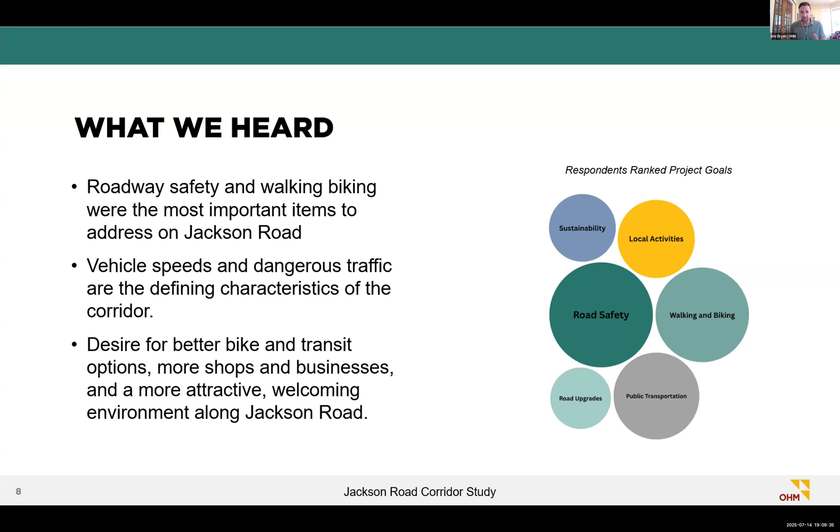There's a desire for more and better bike and transit options, more shops and businesses, and a more attractive and welcoming environment. We heard from some focus group members that there's a lack of identity in certain parts of the corridor as well, so we took this opportunity to identify ways to coalesce around a feeling we could strive for along the corridor.

I'm going to go through what we recommended. These are higher level recommendations at this point. I'm happy to answer any specific questions, but to be respectful of your time, I'm not going to spend a lot of time going through all of these - I think you all have the draft report as well.

So we organized everything into 5 focus areas: transit access, non-motorized access and connectivity, roadway safety improvements, development nodes and land use, and environmental restoration and preservation. These are the 5 goals we set at the beginning of the project.

When we think about transit access, the goal with these recommendations is to enhance how people use the transit network. Right now we have both AAATA and the Wave running along Jackson Road, and there's some desire for people to use it more, but they don't feel comfortable getting there and using it on a daily basis.

So some ideas we had to help spur that along - one, just making the fare system integrated between Wave and AAATA. That's sort of out of your control, but something important to mention.

A mobility hub in the Meijer parking lot - we already know there's a transfer point on the west side of Meijer, kind of hidden back in the corner. Our thought is to bring that out into the front, dedicate some parking spaces, and make a park and ride similar to the location TheRide has out on Plymouth Road - a place people can go to easily and transfer to take the bus into town.

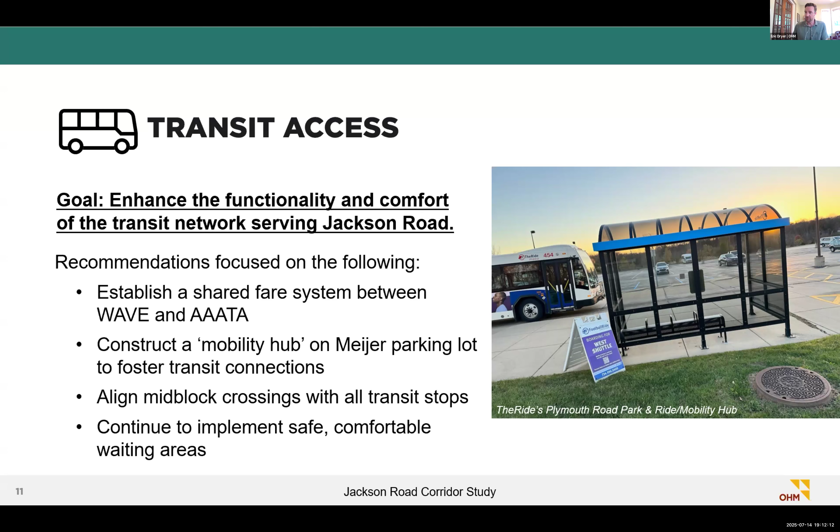It's a bus stop with a nice shelter and comfortable place to wait, some amenities, and real-time arrival signage, plus a parking lot with dedicated spaces for park and ride riders, and multimodal connections for a safe and comfortable walk or bike into the area. We'll also make sure there's wayfinding signage from Zeeb Road and Jackson Road saying there's a nice bus stop right in front of Meijer—come on in and use it.

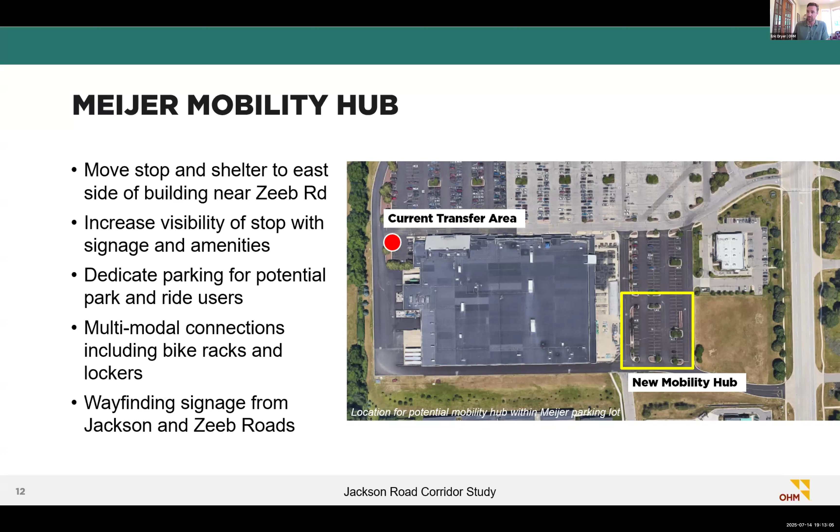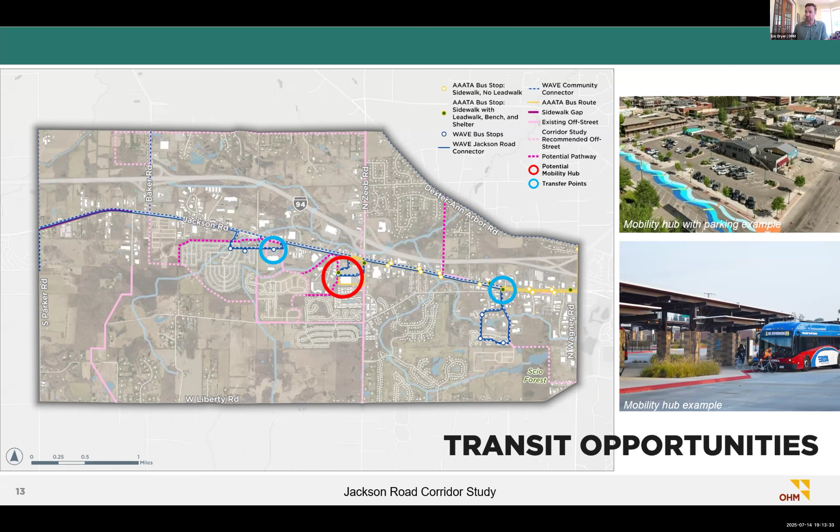This shows the scope of all the transit recommendations—where some of our mid-block crossings would go, where the transfer hub is located, and some other smaller transfer points that could be more like an enhanced bus stop, with a bit more of a waiting area and places for bike parking. It also shows how this organizes and fits within the larger transportation context.

When we think about non-motorized access and connectivity, the goal with this focus area is to make it easier for people to walk and bike. We've got a lot of adjacent neighborhoods on either side of the corridor, particularly to the south, and we want those folks to have the opportunity to walk and bike when they want to access Jackson Road. There are a lot of amenities here, but what we heard was that people felt tied to their vehicles just to go to the grocery store or pick up a gallon of milk.

Some of the things we came up with to help foster walkability include filling all the sidewalk gaps—kind of a no-brainer—making sure there are no places where you have to walk through grass, particularly in the winter when there may be snow.

Introducing some pedestrian-scale lighting and landscaping—in this image you can see a light at the mid-block crossing shining directly on the pedestrians. In the months when it gets darker early, or even at night, we need to make sure pedestrians are visible, since there's a lot of traffic on this corridor and visibility is a big thing.

We want to increase the connectivity of our non-motorized network to and along the corridor. We've got the border-to-border pathway that runs through the township, the Zeeb Road pathway, and a whole network of pathways either in process or already constructed. Making sure people can get up to Jackson Road and back down to where they need to go in a safe way is really key to the future of the corridor.

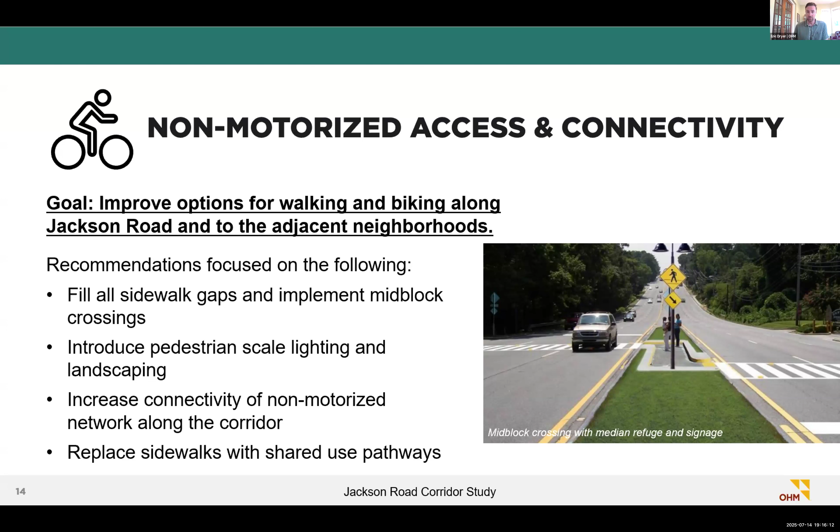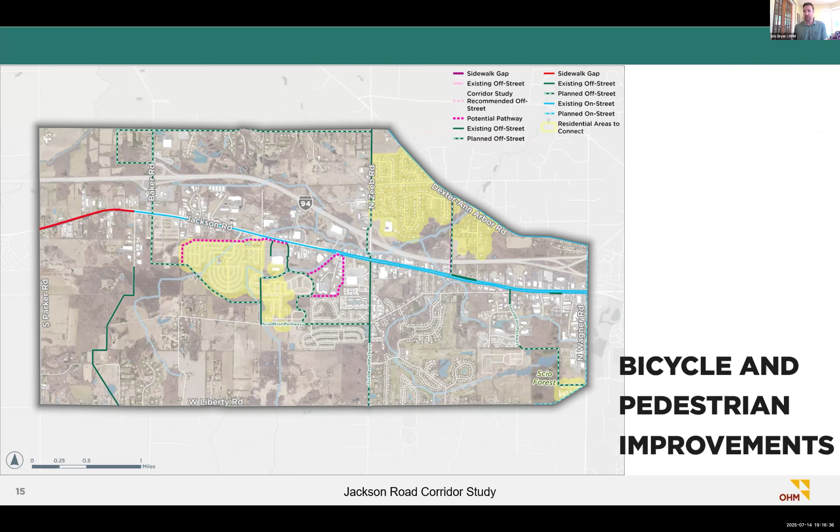Just a couple of recommendations here. We identified a few additional off-street pathways that connect into some of the neighborhoods. This builds on the PROS plan and some of the other trails and pathways you all have been thinking about, really trying to connect everything together a little more seamlessly.

Roadway safety improvements, this is the big one. Improving the safety and comfort of all users, including people in vehicles and motorists, but most especially the most vulnerable roadway users—your pedestrians, your bicyclists, your transit riders. A lot of this focuses on slowing vehicles down to the actual speed limit. We heard a lot of stories of people driving 60 or 70 miles an hour down Jackson Road, and that is dangerous for everybody.

So we want to make sure people are driving the speed limit using some geometric or roadway changes. One or two opportunities to do that are narrowing the roadway lanes to 11 feet from 12 feet, and reducing the turn radius of our turns. If you see in this image, there's just a little bump-out of concrete and some paint. That reduced radius means vehicles have to drive slower to get around it—rather than taking the curve at 20 or 30 miles an hour, they have to take it at 10 or 15, which is safer for people crossing the street.

We want to reduce conflict points by limiting the number of turns, and particularly the number of driveways—driveway consolidation. There are some areas along this corridor with a very high driveway density, and that contributes to a lot of potential safety issues.

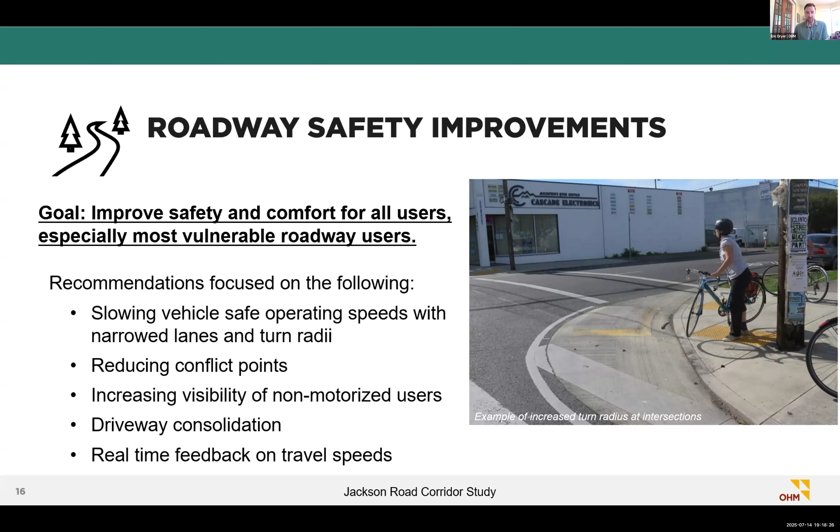We want to increase the visibility of non-motorized users by raising sidewalks, raising crosswalks so that people are visible through intersections, and then providing some real-time feedback on travel speeds.

When we talk about visibility, the raised shared use path crosswalk at a driveway entrance is a concept that could be applied to this corridor, where your head is above the height of a vehicle at the intersection or driveway entrance, so vehicles coming in or out see you as a cyclist or pedestrian much more clearly.

Additionally, you could add brightly colored paint and high visibility crosswalks to ensure vehicles see you as you're crossing. Introducing things like street trees, vertical elements, and moving buildings to a zero or near-zero lot line will help reduce speeds by giving that feeling of enclosure.

There's been a lot of research on real-time feedback signs and how well they work, and surprisingly, they work pretty well. Research shows they help slow vehicles down closer to the speed limit. It's not the end-all-be-all, not the only thing you'd do, but it does help.

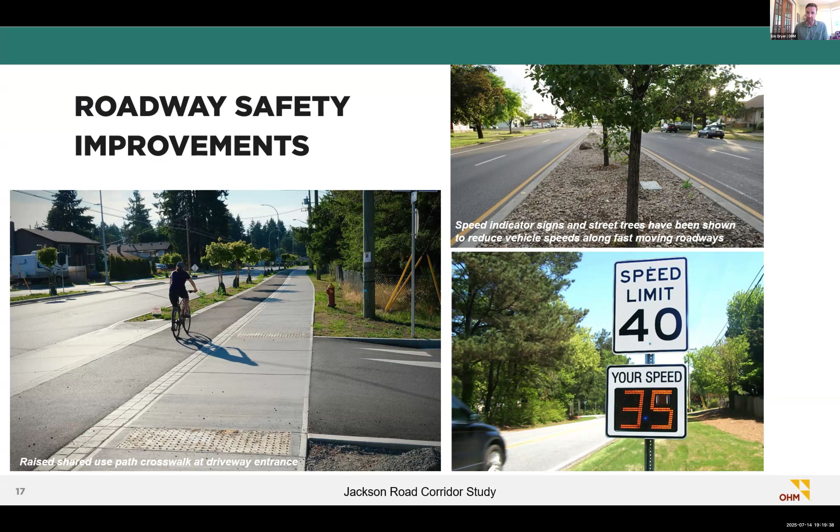We did some concepting of what Jackson Road could look like now, 3 or 4 years from now, and maybe 10 years into the future. This shows the existing conditions—a lot of parking lots abutting the roadway corridor, standard bike lanes in the street, 12-foot drive lanes, and a big center median. It's wide, open, and fast—not a place people would really want to go or choose to walk or bike.

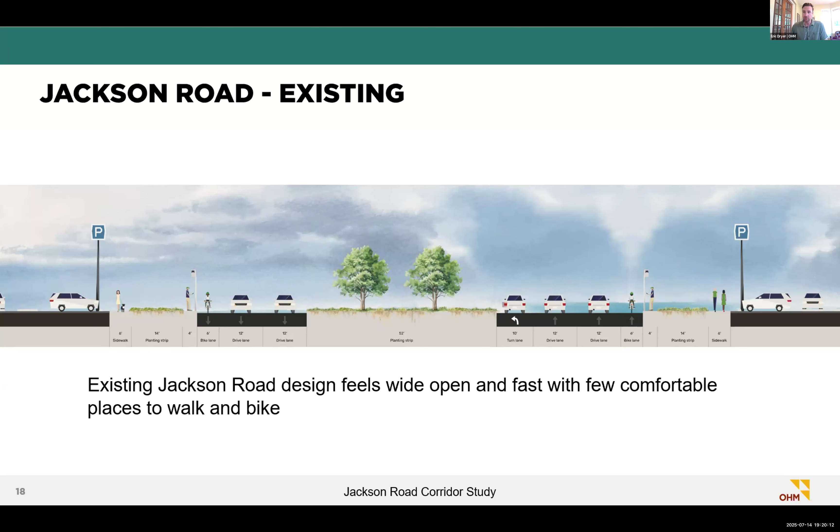With a little planting and some reallocation of space on the street, we can narrow those drive lanes down to 11 feet, giving extra space for a buffered bike lane. That bike lane helps slow vehicles down due to the narrowed roadway width, and also provides a shorter crossing distance for pedestrians. Adding more trees into the median—making sure no utilities block it—helps slow vehicles down due to the feeling of enclosure, and we're also introducing improved bus stop and transit elements.

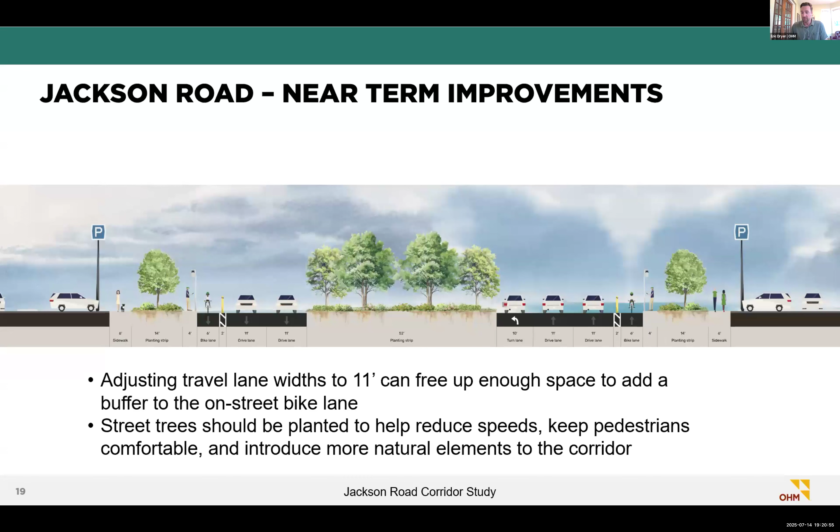And then into the future, as development starts to come in on some of the nodes we're going to talk about, moving those buildings up to the lot line, having a sidewalk right up against those buildings, and then taking our bike lane, transitioning it onto the outside of the curb, moving the curb line to where the buffer was. Still maintain 2 vehicle travel lanes, center turn lane, but the roadway has less pavement, less impervious surface, and a little more space for things like high quality transit shelters, the shared use path, 2-way bike lane with a sidewalk.

This is showing up to 16 feet if you really wanted to get wild with it and provide some space for non-motorized users. What really supports a lot of this is the landscaping and street tree growth within the median and within the sidewalk planting strips as well.

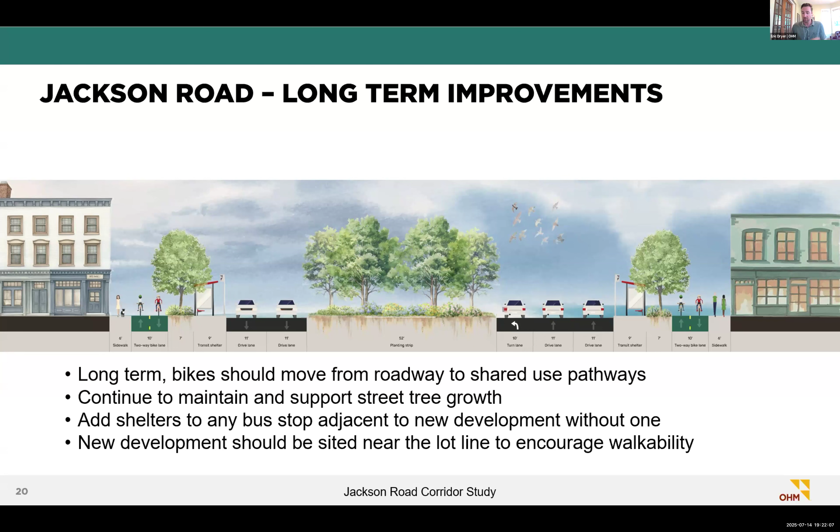We did a little thinking about development nodes and future land use. This wasn't the total scope of the project, but it's an important piece to start to think about how Jackson Road transitions from a place where people drive through to a place where people drive to and stay. The recommendations around land use really feed into some of the transportation elements we're thinking about. So there's 4 key areas along the corridor where we want to target development: Baker Road, at Menards, at the Zeeb Road intersection, and the Quality 16.

These are sites that have had a little bit of interest, if not full interest. There's already been some work done with the new development at Baker Road on the south side of the street, and we want to utilize that activity to spur new excitement and activity within the corridor. There's a real opportunity here to establish design standards that promote walkability, placemaking, local character, and build upon the non-motorized infrastructure we're recommending as part of the streetscape improvements.

This isn't going to happen overnight, so we know there's going to be a need to activate these nodes with short-term temporary activities and then transition those into longer-term permanent developments.

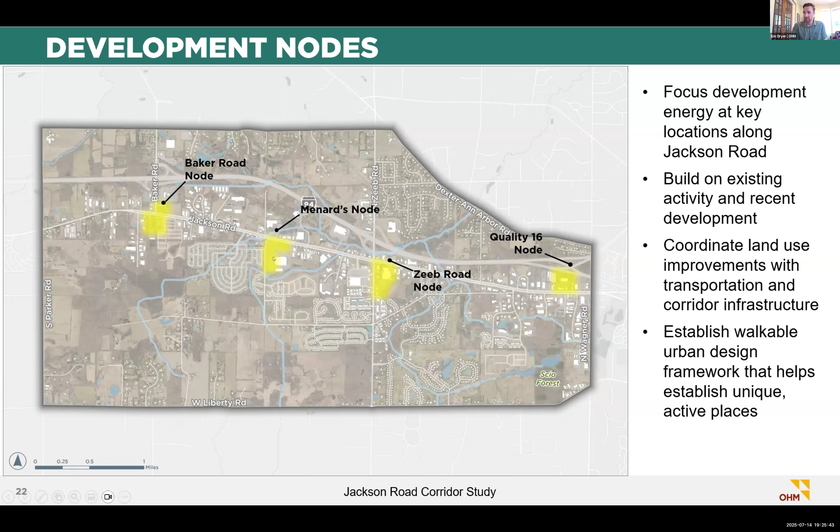So we pulled some ideas from other areas around the country. For example, the Menards site that wraps around the building there - these 3 parcels are about 18 acres, ranging from 10 to 33, you can see what other communities have done around the country. This is mixed use development with a range of retail, commercial, hotel, maybe a big box store thrown in, or a cinema, some green space or public space, and quite a bit of residential, both within the site itself and surrounding.

You can see the Suwanee Town Center in Georgia - their town center is this development here, but supporting development has folded in once that area got established.

These range from 10 to 20 acres, which seems to be the typical size we've seen, but all the way up to 33. This is the Rochester Hills example, a local example that we can pull from.

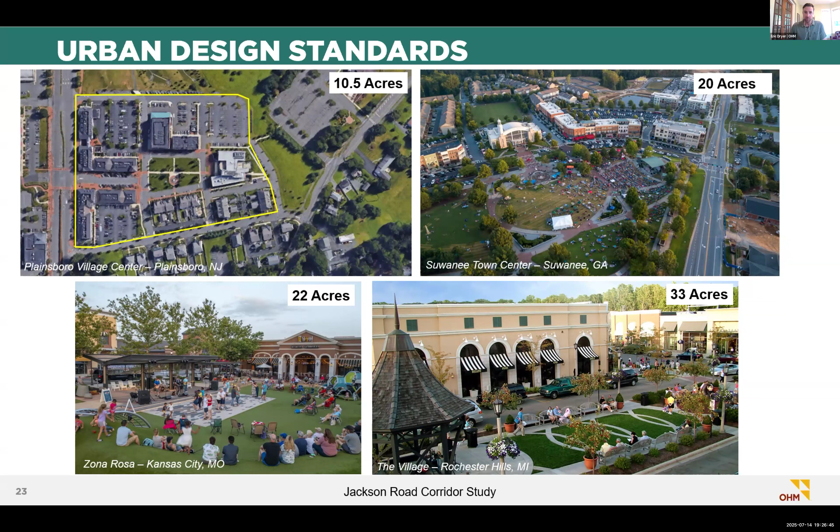We thought what makes Scio special is the surrounding natural areas that have been either preserved or are part of conservation land, and utilizing that idea of access to nature as a design feature was something I think you all could build on. Thinking about how to integrate those preserves and natural areas into future development could have a really strong way of attracting new people to the corridor and attracting residents to support these places. And making sure they're connected, like these pathways you see here.

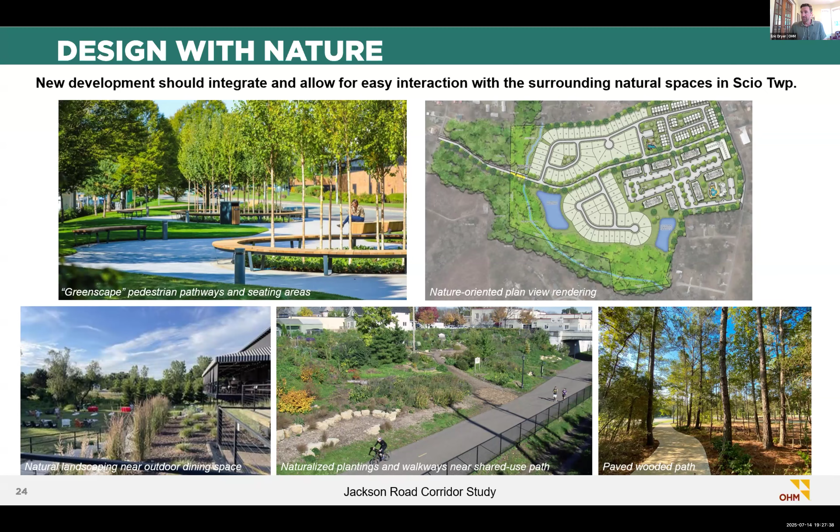And then finally, environmental restoration and preservation. This builds on what I just talked about, but maintaining the township's natural feel and character by having these tendrils of nature fold into the corridor. The idea around street trees, landscaping, greening up the corridor as much as we can not only helps with traffic safety, walkability, and making people feel comfortable, especially when it's hot out, but it also invokes that feeling of nature. We have a lot of big trees here in Michigan, and it's a good way of showing the character.

As part of that, we can incorporate green stormwater infrastructure within the roadway in certain areas, and within new developments, to ensure we're putting as little extra strain on the existing sewer system as possible. Thinking about the future of Jackson Road as this green corridor with connections down into the conservation areas and parks, up to the border-to-border trail, was a recurring theme that came up. A couple of recommendations around GSI, and this can continue to be updated as we identify other areas to include GSI.

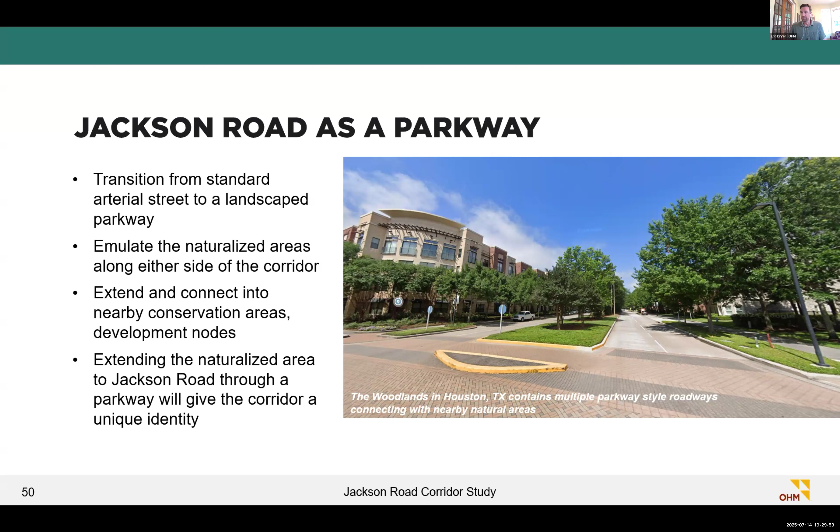So overall, that's a really quick overview of what we developed. The plan document itself has a lot more detail about specific recommendations. But really, this is intended to guide you all in decision making into the future and help investors, developers, and grant opportunities identify the next round of investments.

It's important to note that each of these recommendations will work on its own. They'll be fine. But as you start to incorporate more and more of them and co-locate them in those nodal areas next to each other, the recommendations will build on themselves. So you'll start to see greater and greater positive impacts as you connect trails within a development and have new shops, restaurants, and housing all co-located together. We want to co-locate those improvements in those nodes and then build out. If we try to spread things too thin, you're not going to see the effects that you want.

Connectivity to Jackson Road is essential for connecting new developments up to the amenities along the corridor, and ensuring people can get to other areas within the community. And again, we want to try to maintain that naturalized character as much as possible, bringing that feeling of nature up as close and along Jackson Road as we can.

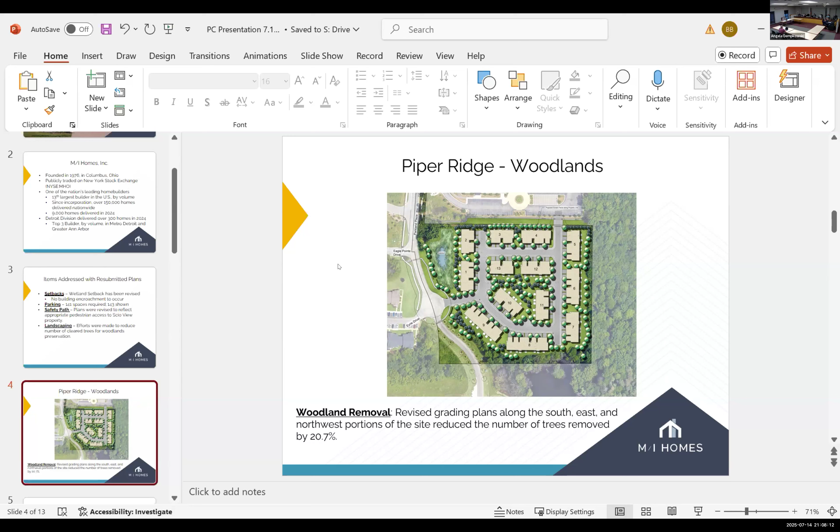Commissioner Fletcher, thoughts? There's gonna be trade-offs somewhere, they're gonna have to remove trees, but it looks like you plant some too, and no, they're not gonna be mature and big and beautiful overnight, but we gotta start somewhere. And I think what he's proposing is probably better than apartments - you're getting people that are buying versus people that are just tenants with higher turnover. It's not a huge piece of property, and you know.

I'm inclined to agree with both of these commissioners, but I am concerned about the placemaking stuff, so you need to work on that. It's not understood, and again, I will put on record, more than a path, I mean we need a playground, something.

Pickleball court, something. Well, little kids don't get into pickleball. But the younger generation is getting into it. More than that, the young professionals are. But it's easier to play than tennis. Sure, it's easier when you're used to it.

And frankly, I'd be willing, if you made the commitment, that the site plan would come back with some active recreation, placemaking. That active recreation suitable for young professionals and families.

I'm inclined to think that's a suitable use of the property. And am I understanding correctly where the gravel lot's gonna be, the 6 spaces, that's access directly into Saginaw Forest, right?

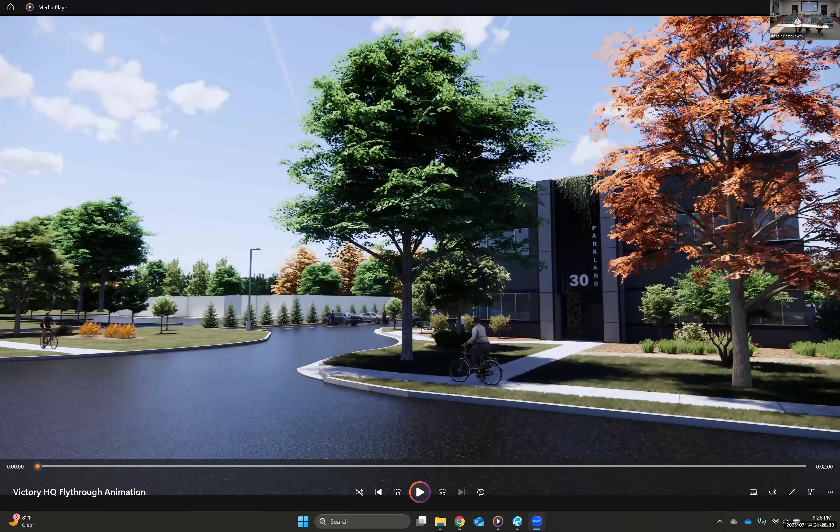So what we're looking at tonight, see the second building here, that's the first building that stands today, with the 30 on it. That building will be completely full. As he pans around here, we'll look at phase 2. We'd like to add the next building, which would give us space for an additional 60 to further consolidate people we've got scattered, currently working from home, as well as additional office space to bring them all here at Scio Township.

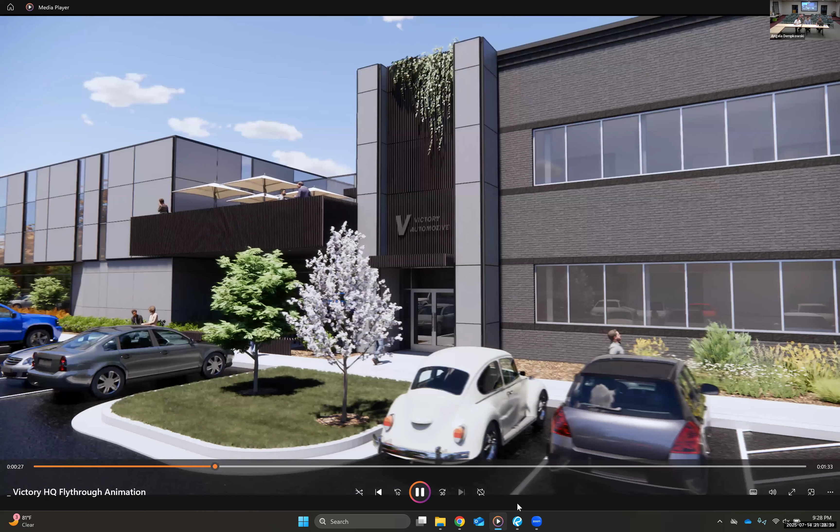So as part of phase 1, we're trying to move into the existing building there on Parkland. Phase 2 of this project would be a roughly 23,000 square foot addition to that, plus a little extra for an atrium and connector. It would involve restaining the existing block on that building facing Parkland, and painting some of the trim details to provide a more cohesive look for the overall concept of the site.

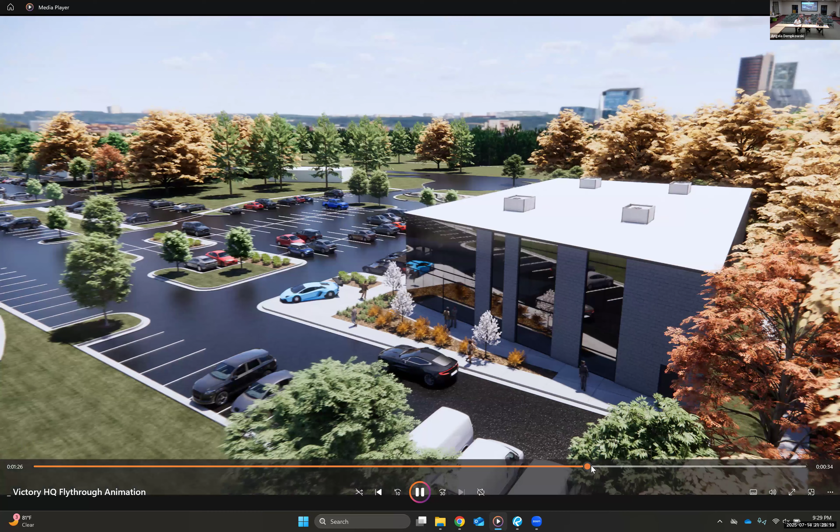Noting some of the things discussed with our neighbors to the south in Parkland Plaza, the property today already has a walking path that we're hoping to rehab, along with some additional landscaping. We planted a number of trees there, and as you can see from the concept, we're looking to add additional places where our employees can get outside and be involved in the natural landscape.

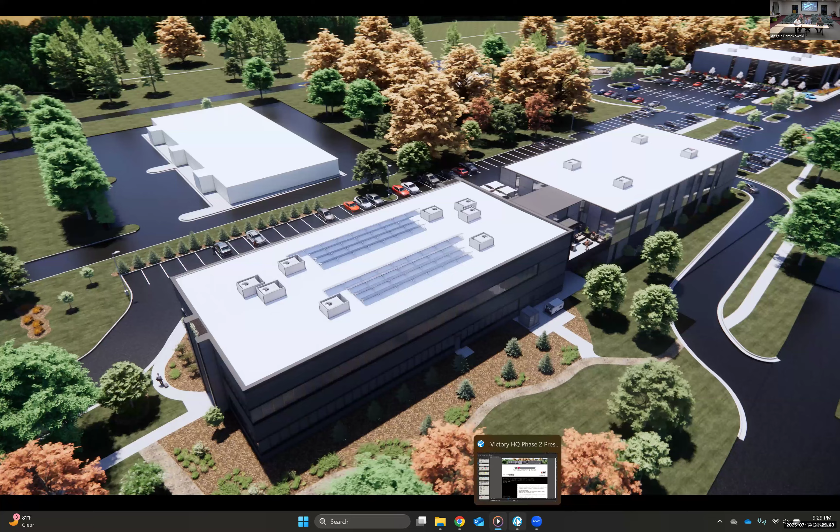We actually did talk about pickleball courts painted on our parking lot. We want to have that, and the building will also have a gym, so we want people to be active and not just sit inside all day. The property today has an existing koi pond to the south, which we didn't maintain. We're hoping if we add the next 2 buildings, we'll continue to expand more of the landscaping and the recreational side of it.

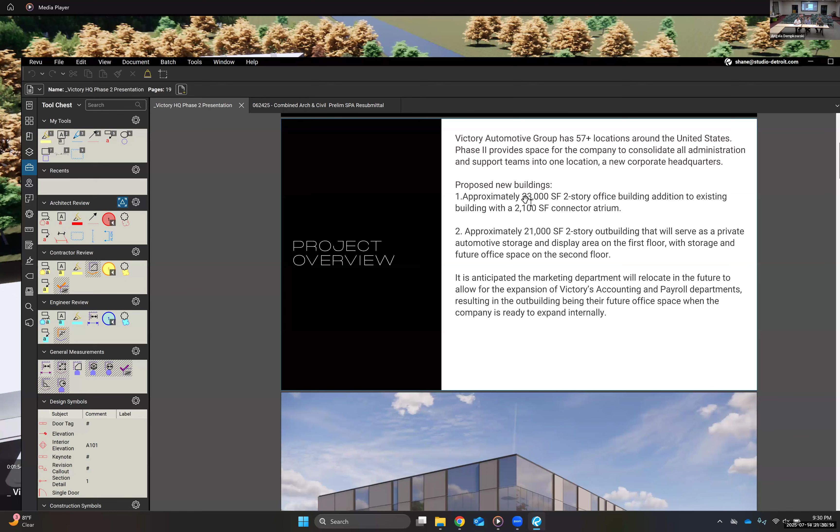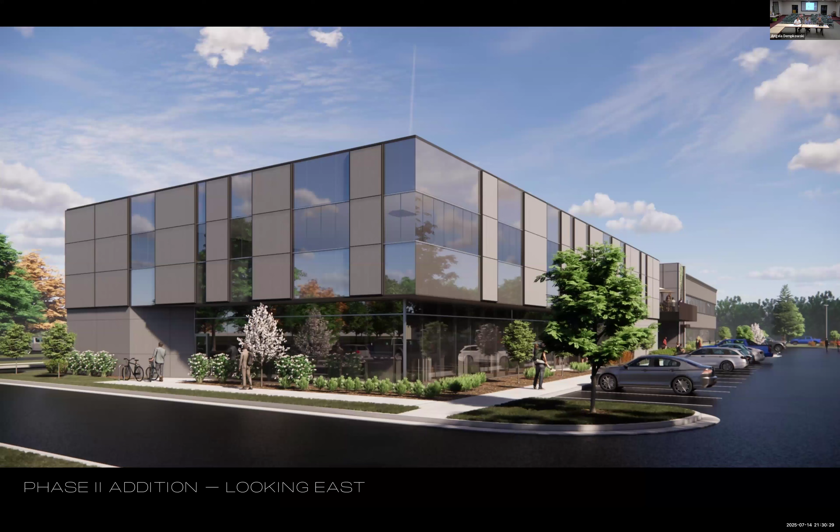Again, these are proposed additions. This is a by-right use under the OS1 zoning district, for office use. We are proposing again 23,000 square feet.

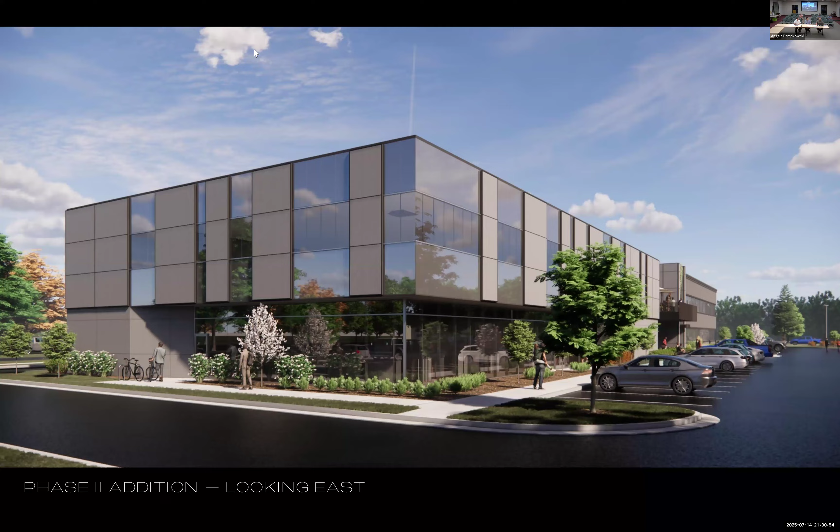Well, why are you here? You want something? They need to come here for their site plan. Oh, you want approval of your site? One approval of site plan, please. I'm just trying to keep it straight for myself.

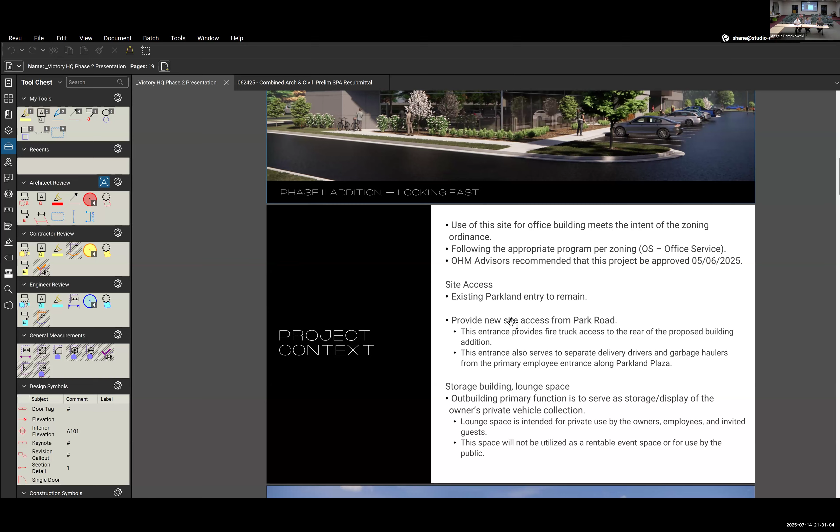So I got a 1-page site plan. No, no, I must have downloaded something. There's 34 pages in mine. 34, yeah, online if you want.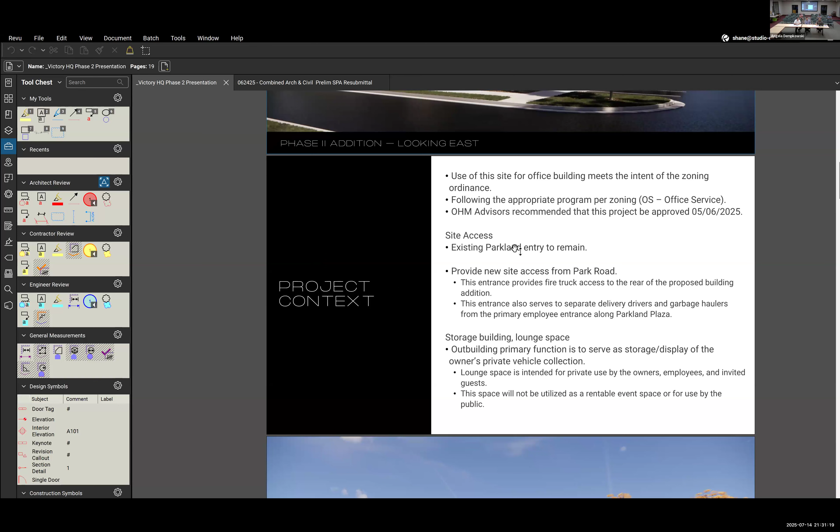Site access is to remain off of Parkland. We are improving the access off of Park Road. This will allow additional fire truck access from that drive to the back, and also serves as a separate delivery point for drivers and garbage haulers.

There may be some questions about this proposed storage building, lounge space, which is what we're referring to as the outbuilding on the plans, all the way to the west side. This is a private vehicle collection storage area for Victory's personal collection cars. We do have a lounge space on the first floor, which will be open for internal events only. This is not a rentable public event space—it's internal, strictly for their events and corporate functions.

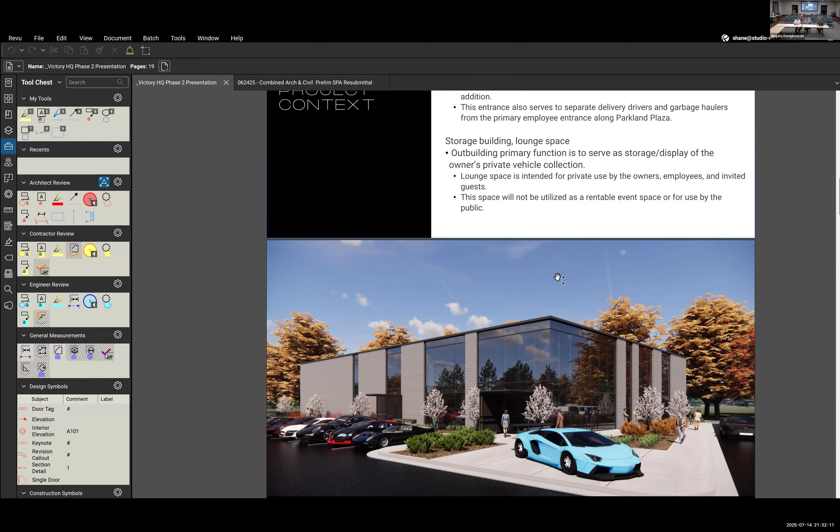They'll bring all their staff from around the US, right? Yeah, across our 60 locations, we have approximately 3,500 employees, and we do multiple times a year training with our general managers, controllers, accountants, and other people from the store level. Today we always have to rent a space—we go to Weber's, or the Detroit Westin Hotel, or other places across the country. So we're looking forward to adding this 3rd building for those guests to come do training and meetings throughout the year.

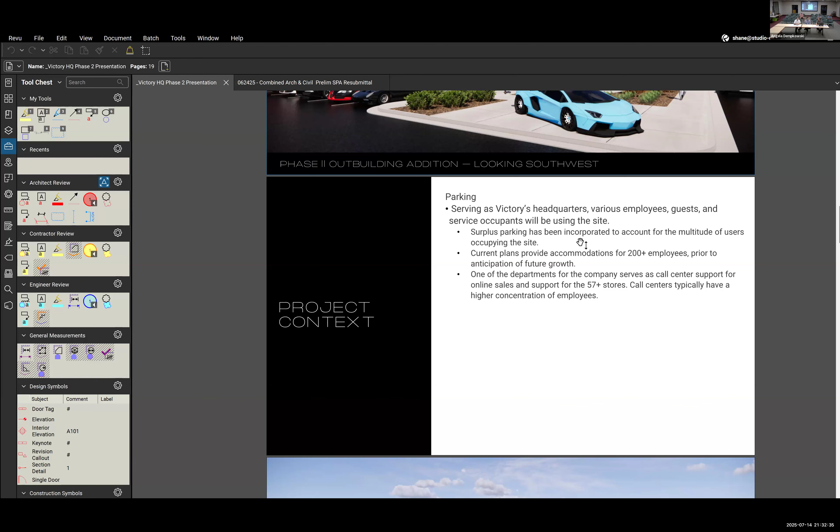But it would be more like an evening or weekend type event, because we want them working during the day, so we bring them for training off hours. That helps balance parking loads across the campus. It will be a private event. And of course, given that we have an inventory of somewhere north of 12,000 cars at any one time, we'll store a few cars there for display or special training purposes.

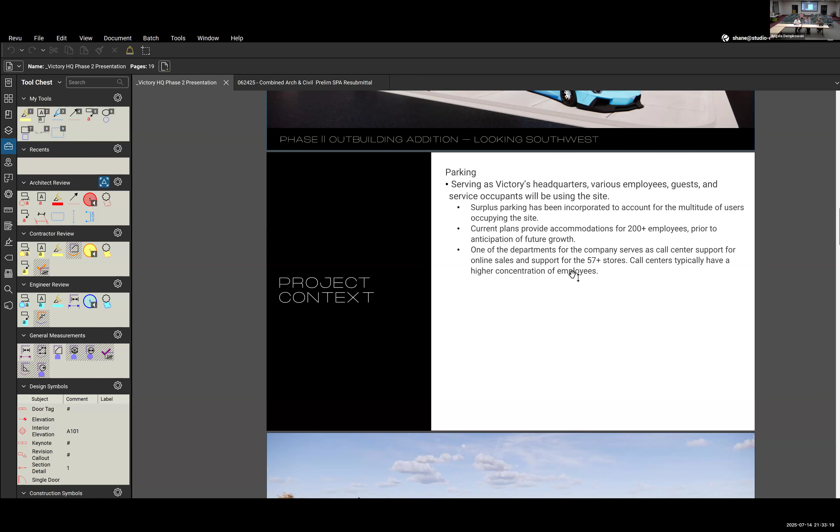There were also some comments about the parking overage on the site plan. Part of the reason is that the 40,000 square feet of office space also houses a call center, and we've got space for 100 employees alone just in the call center. So the additional, I think it was 90 spots, would be used for staff and employees for day-to-day functions.

Phase 2 does not negatively impact nearby residential spaces. As mentioned, we have a walking path around the entire site, and we have the existing koi pond that is fenced in on the southern portion of the property. We've made efforts to maintain existing vegetation, and Joe can talk about the mature trees we're leaving.

Environmental considerations: our existing building does have solar panels on it, so that's a good thing. We'll be looking at the addition of 8 EV chargers, 4 on the existing structure and 4 more on the proposed outbuilding. We've also had conversations about looking at geothermal heating and cooling, which is something we could take into consideration as we move forward.

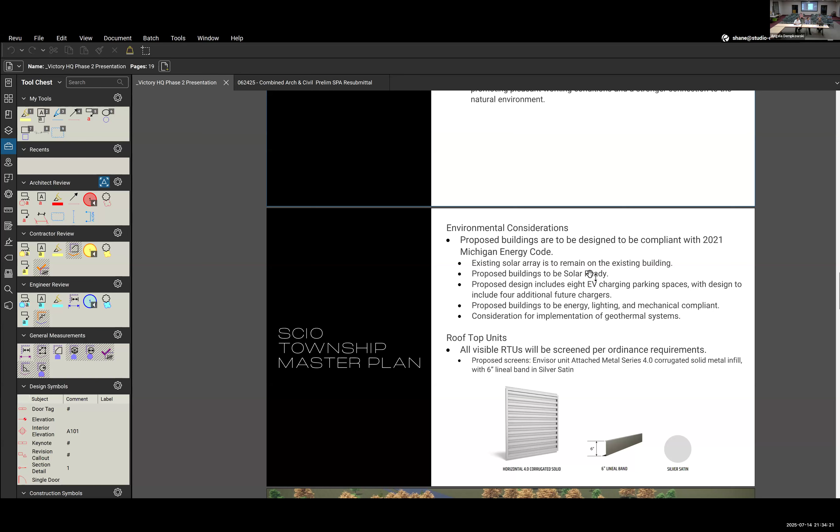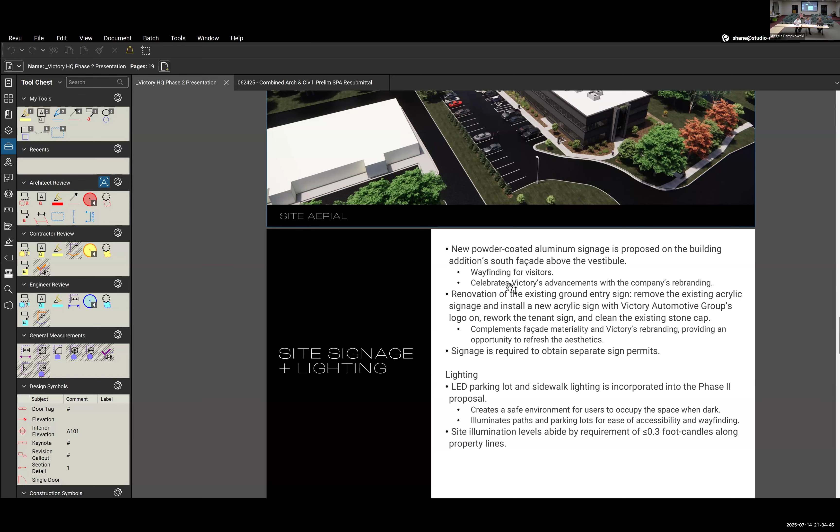Rooftop units are screened; there's documentation in your packet about our typical screening. For site signage, we understand it's a separate permit, but we did show some concepts so you can understand what we're looking at doing, and there's one more tenant in the lower building that needs some signage as well.

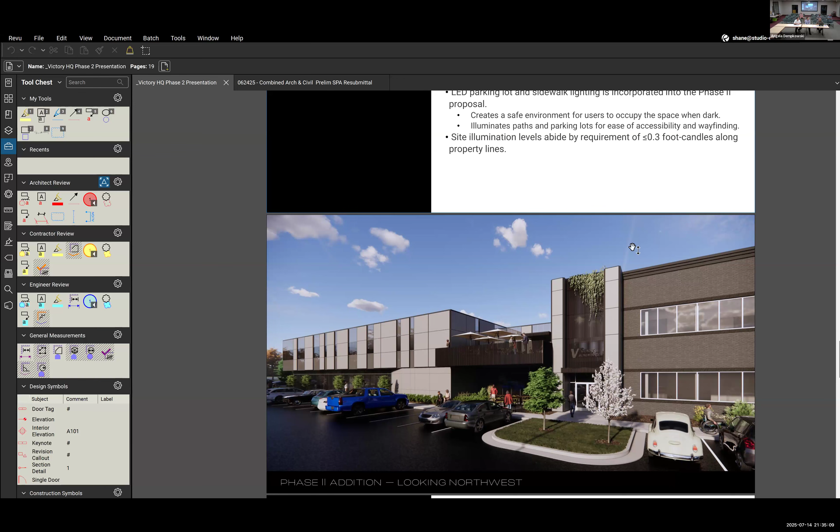For lighting, we provide photometrics and cut sheets, and I know there's a question about the 0.3 foot candles at the northern and southern property lines. I can pull up the photometric and explain how those lights are so far set back from the northern side that we didn't even put calcs on that portion, so I can go through that if needed.

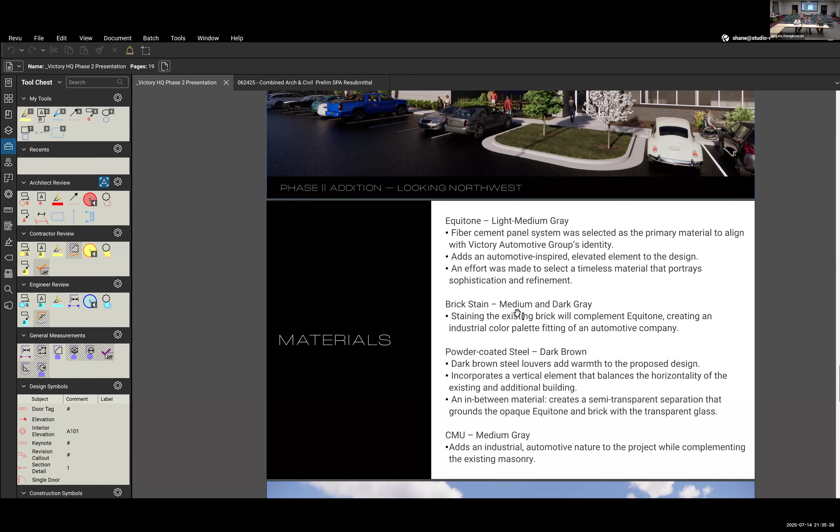For materials, I have samples of the proposed facade material. It's a fiber cement panel with rain screen principles, so it stays nice and dry. We're also doing a lot of glass and aluminum curtain wall for the remainder of the cladding.

On the brick, again, we're not going to paint it. I'd love to stain it, to maintain that texture and blend in a little better with the color concept we're doing on the addition and the outlook.

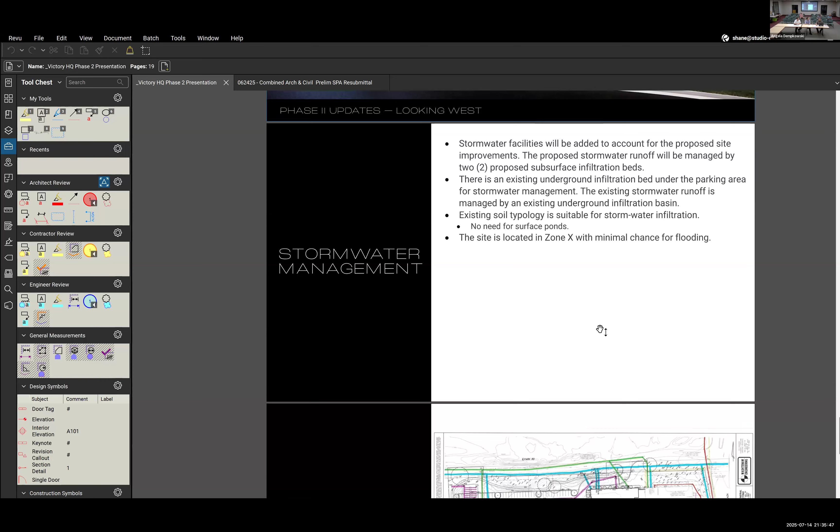Joe, do you want to talk a little about stormwater? Sure, can we go to the next slide? As Shane mentioned, this site is kind of unique - it actually has 3 road frontages, and it's a project that was previously designed but never fully built.

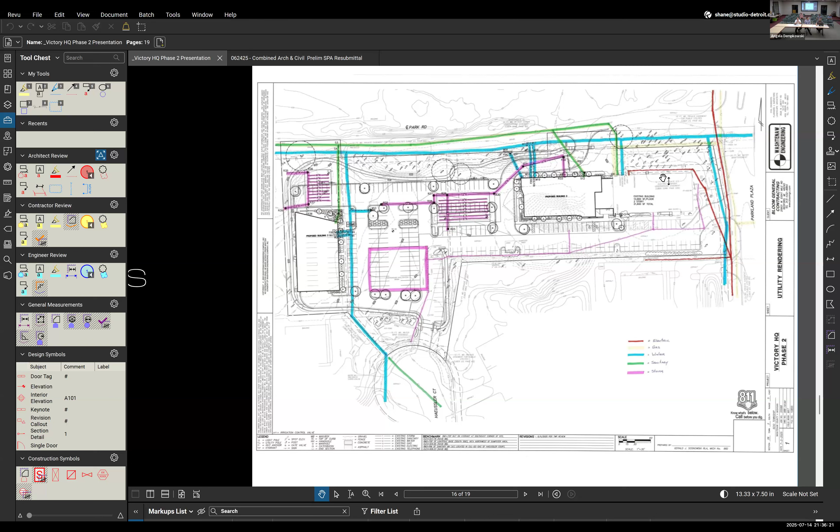So it's got a water main loop already through it, and it has sanitary sewer service to most of the buildings at this time. There was a previous home there that was already torn down, and we're actually going to be reusing that sewer service that was connected there.

The storm sewer system, shown there in a pinkish color, includes one existing underground stormwater detention system that will be maintained, with 100% infiltration capacity. We've also got 2 other infiltration systems on the property that will be underground, so we can preserve the upper space as green space, lawn space.

This site's sand, when tested, ranged from 55 inches per hour infiltration rate down to 5 inches per hour. So we're able to accommodate 100% of all our stormwater on site - from buildings, parking lots, everything - into the ground, back to our aquifers.

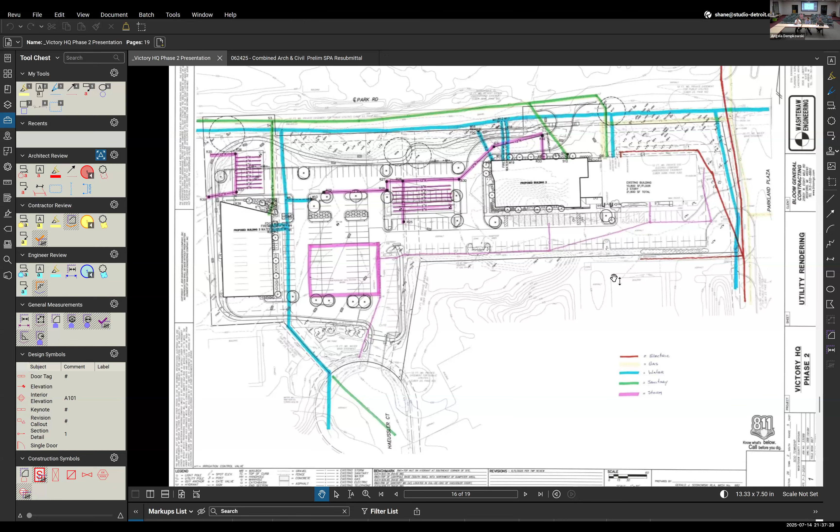On site, for regulated trees 6 inches and larger, there's slightly over 1,000 DBH, or 89 trees, that qualify on this property. We're removing 16 of them. There are a lot of benefits to relocating pathways and reusing the existing driveway location rather than making it shorter - we kept it where it was, a little longer, so we're also able to maintain those trees. We're well within our 20% allowable removal, and none of our heritage trees, of which we only have 4 on the site, will be removed - we're preserving all our heritage trees.

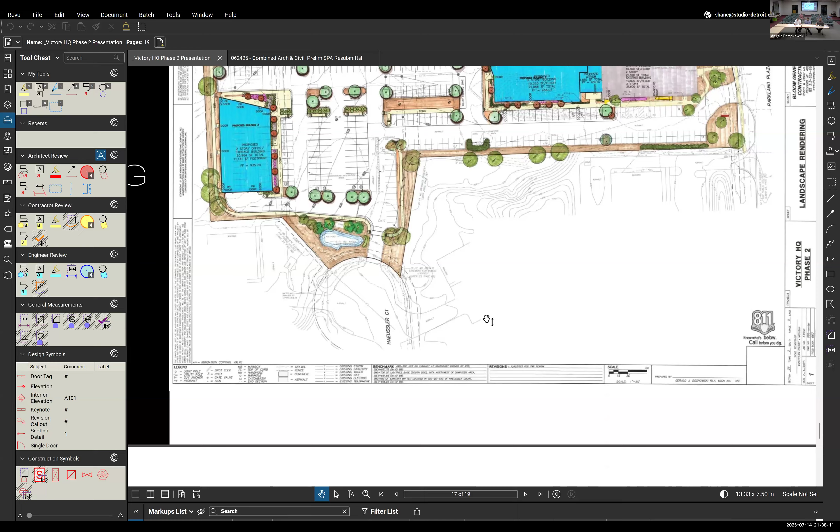So there's no wetlands on site. That's it for right now, as far as that goes. Now into the landscape plan.

You can see we're preserving a large number of the existing trees, especially along Park Road. There's actually more trees than what we showed too - a lot of smaller trees planted around the site if you've gone out there, you've seen them. And of course we're adding a lot of trees that we needed.

We do have a couple landscape variance requests for this project, mostly due to existing trees that are there. One of our variances is for the buffer along public roadways - along Park Road we've got a large number of existing trees, so trying to squeeze more trees in between those just isn't going to work well there. We've got a pretty good screening system along there, with perimeter shrubbery too, it's all pretty green in that area. So we're asking for that variance for the site, per the existing plans.

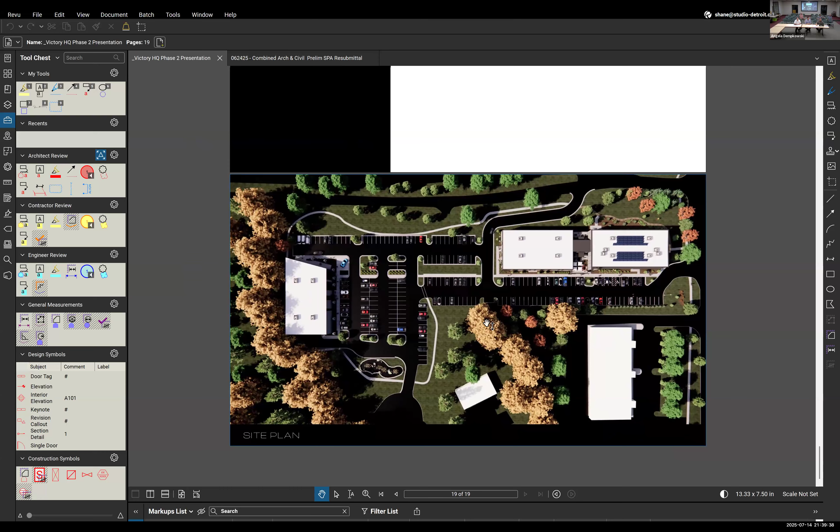A question for you, Joe. Did you look at whether there was any place within the site plan that you could enhance the landscaping with some of the required plantings that would have been required in that buffer?

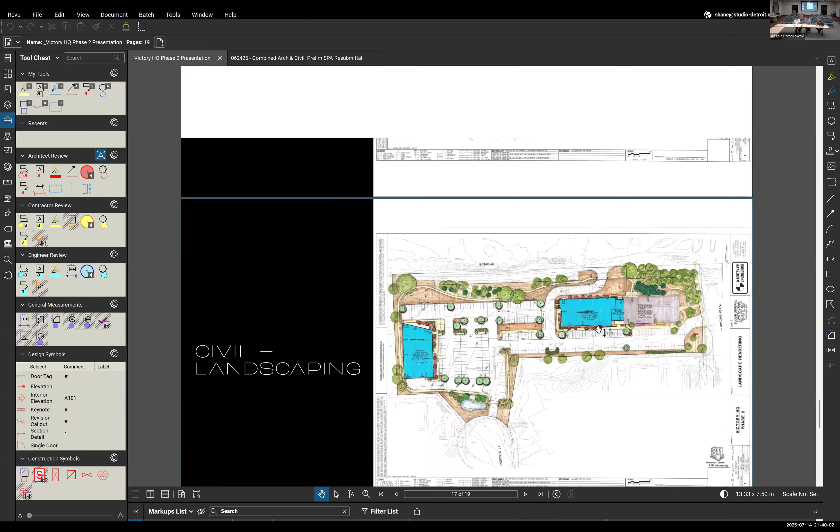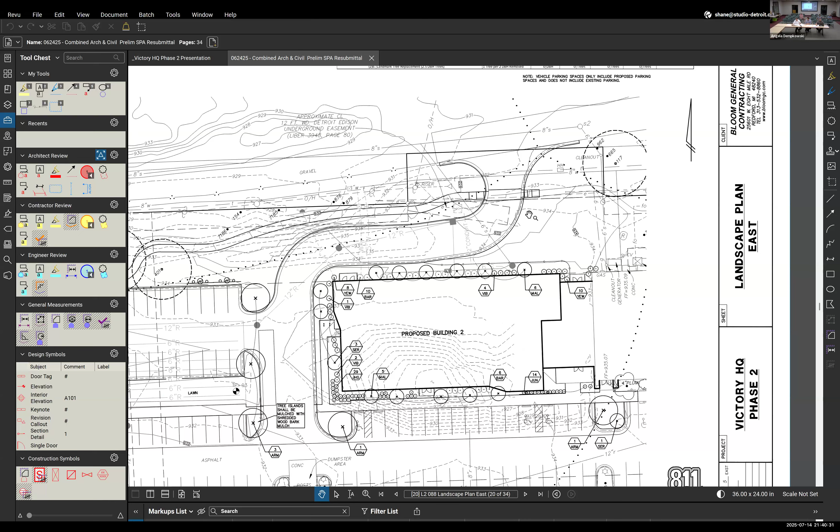I think we've added more plantings than what was required. Interior landscaping trees, L2 - required to have 10 landscape islands, provided 14. Required to have 19 trees between existing and proposed, and we've got well over 24 trees. Parking lot perimeter trees - we've got a lot more than what's needed for code. Parking lot trees needed 46, we got 73.

And again, those trees are what's making it difficult to add those shrubs - all those existing trees, we try to preserve as many of the existing trees as we can, because you get more shade out of an existing mature tree than putting in a small 2-inch caliper tree and waiting 10 years for it to grow back up.

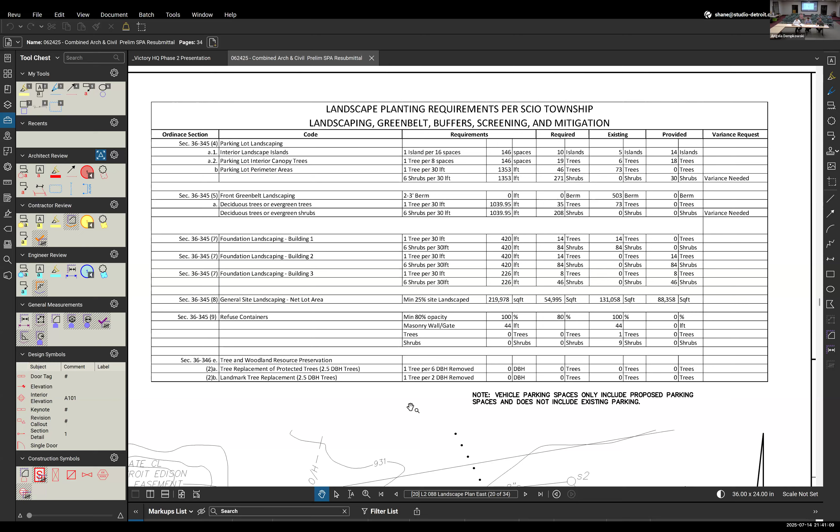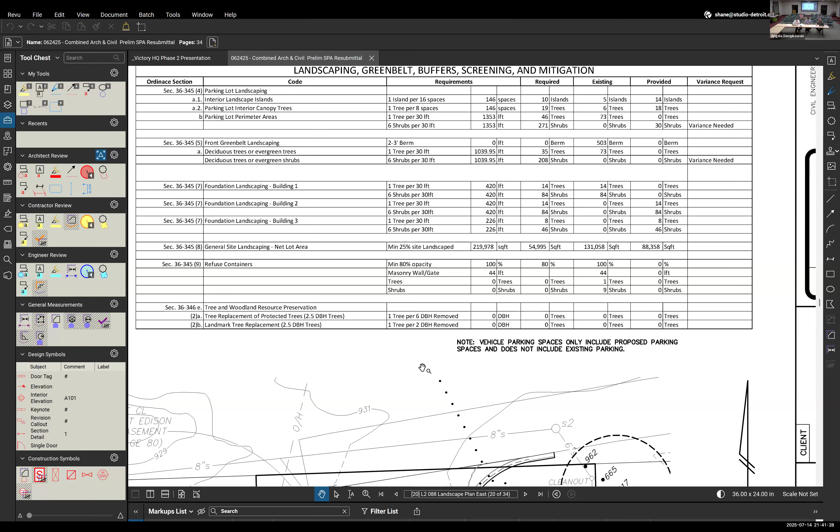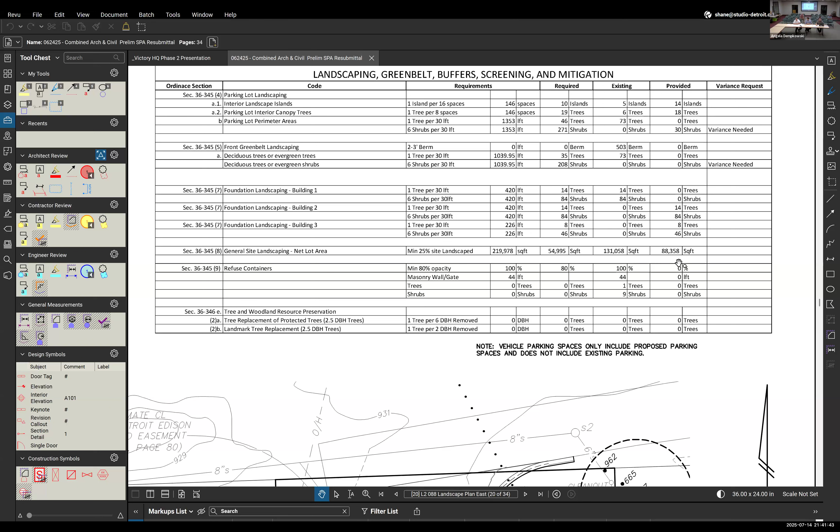So under foundation plantings, 6 shrubs per 30 feet, whereas we got 84, so they were providing the minimum we needed there. And what are going to be open spaces - 25% site landscaping, which is 54,000 square feet. We've got between existing and provided over 200,000 square feet of open space - almost 3 times what's required.

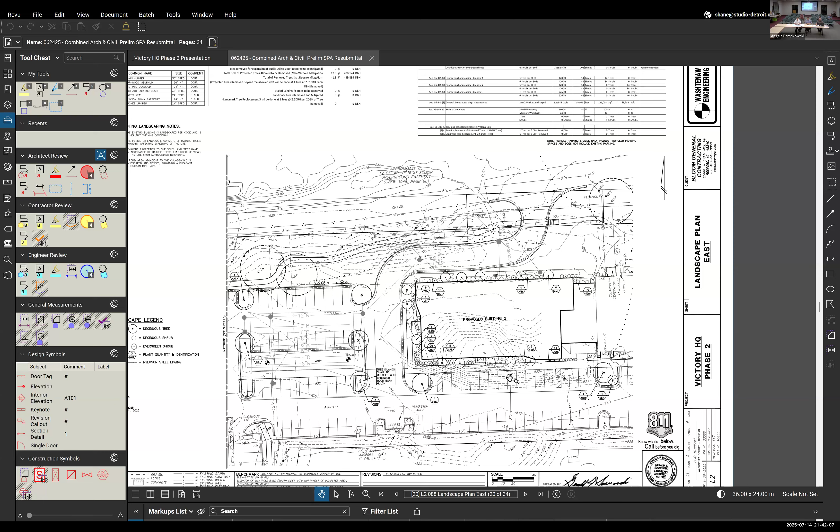So, yeah, go ahead, question. There's 2 variances to the landscape requirements, and that's - not a cover sheet, okay, but it looks like it's in the perimeter, parking lot perimeter, and the green belt, the front green belt. Okay. And that has to do with the Park Road.

Any other questions? I'm sorry, were you done? Yeah. Okay, any other questions of fact with that? So as I understand your presentation, the only thing you're asking is that we waive the buffer along Park Road. It's actually 2 variances - the buffer along Park Road and the buffer for the parking lot screening. I get that - so the green belt and the perimeter parking lot screening, in this case, is along the green belt.

The perimeter parking lot is along Park Road, not everywhere else. Right, and so the same mature tree situation is in both. So you're waiving both a green belt and a perimeter. And it's not a variance, it's a waiver. We'll get it together - I don't want that, but it's a good reminder, it's not a variance, it follows Joe's case. I know, it's a waiver, yeah - it's getting late.

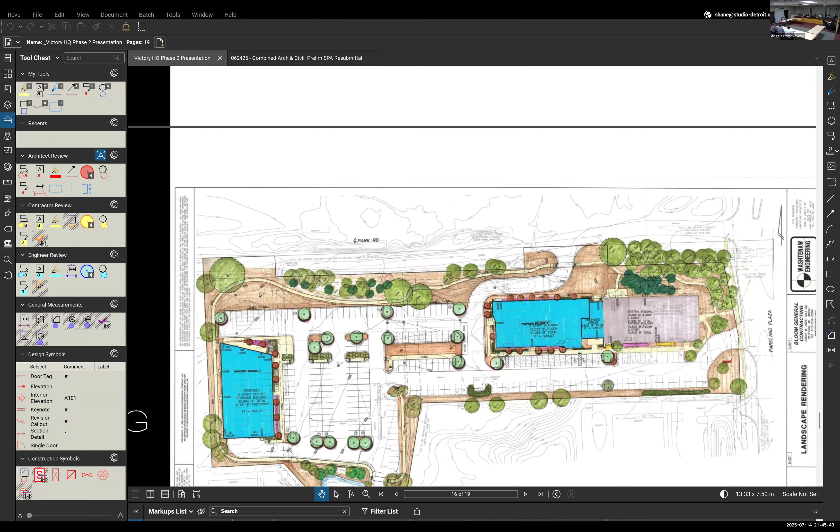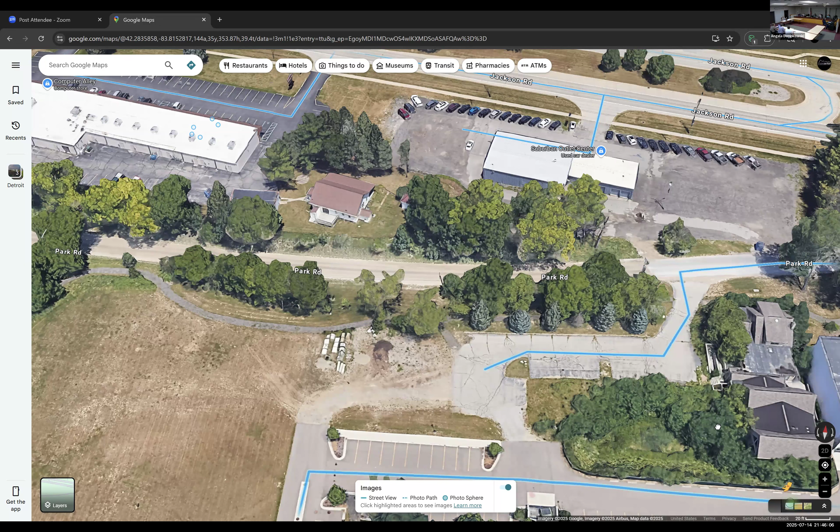Laura, go ahead with your clarification. The properties across from this site on Park Road are zoned C2 general commercial, but this property has two zonings, OS and I1. It's all office and ancillary uses associated with the office. Office uses are also allowed in I1. So, as the applicant said, this is by right development.

We reviewed it and had very few comments for you. This development is very similar to the former Tri-Stone office development that was originally approved, where the first building was built. Building 2 and building 3 are in the same locations as the approved site plan had with three buildings. Site access and circulation is a little different - the applicant is requesting to keep the Park Road driveway. It's my understanding the road commission is okay with that, and the fire marshal likes it for additional access.

We would recommend approval of the site plan with the following conditions: that the township engineer verify the proposed BMPs, best management practices, are sufficient; that the planning commission consider the deviation in parking to allow a surplus of 92 spaces, as the applicant indicated those are spaces needed for their employees; that the planning commission consider the waiver of the required green belt and perimeter parking lot landscaping due to existing mature trees; and that all signage is required to obtain separate sign permits.